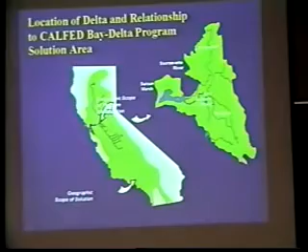You're talking about a situation where you have a lot of rainfall in Northern California, very little rainfall in Southern California, but a big population base there and a big agricultural base here. So the idea is to get water from here to agriculture and then to the urban areas, and the delta is really the choke point, the position where you're trying to get water through.

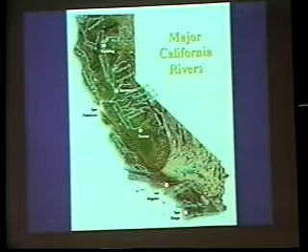Next please. I talked about all the various rivers. As I go through today, I'll be talking about various engineering projects related to the delta, and as I do that, I'll be talking about some of the dams that are on these rivers, and the various influences of some of these rivers, the various flows coming in and making up the flow out of the delta and into San Francisco Bay.

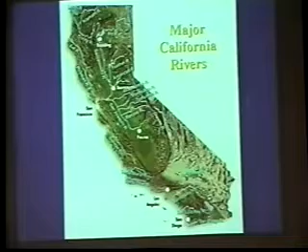This is a highly developed system, of course. You have a lot of dams in the north where the rain falls. Some of those dams belong to the federal government, built as part of a federal project. So you have Shasta Dam up here. You also have, over on the Trinity River, Clair Engle Dam, which contributes to the Sacramento system through a system of engineering piping.

You also have the State Water Project, which is Oroville Dam, which provides water, releases down into the delta. And then you have a way of picking up that water and moving it down into the areas where it's needed in Southern California or in the Central Valley.

There's also some local projects, some notorious and some other. You've got the Los Angeles system taking water down to Los Angeles from the Owens Valley. You've got East Bay MUD, which takes its water through an aqueduct to this area, and you have the city of San Francisco taking water from Hetch Hetchy and moving that through the San Francisco region. Next, please.

So again, from a political point of view, the Delta is very important. It's a source of drinking water. I'm putting that up front because I work for the Contra Costa Water District and we provide urban drinking water, so that's the main thing we look at in terms of dealing with the Delta.

We also have a lot of plant and animal species supported by the Delta. It supports the agricultural industry south of the Delta. There's a lot of housing and infrastructure within the Delta. The Delta is important for fisheries, both those resident within the Delta and fish that come in from the ocean, move up through the Delta and into the upper tributaries. They have to move through the Delta where they're susceptible to pollution, pumping, diversions, etc. And it supports California's $1 trillion economy.

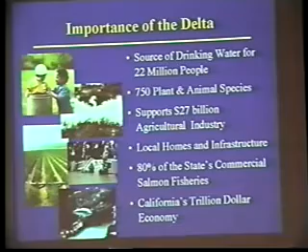Next, please. So again, from an engineering perspective, if you're looking at the Delta, you can break it down into the main flows of the Sacramento River coming in. What I'll be talking about later is some of the plumbing that's been done to the Delta — there's a little channel here that takes water out of the Sacramento River where it would normally go and feeds it into the central Delta. That's why I've just shown the two arrows. We'll come back to that later on.

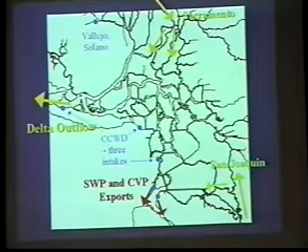And again, you have the San Joaquin River coming in from the south, and I've colored it a different color because it's got a lot of agricultural drainage, pesticides, a lot of extra salt in it, so we need to watch out where that water goes. Most of the time, which is fortunate for some people, not for others, a lot of that water gets brought over to the very large export pumps in the South Delta, and then recirculated back down to the Central Valley.

However, from Contra Costa Water District's point of view, we have these three intakes here. What we're concerned about is the effect of any agricultural drainage and pollution like that coming into this area.

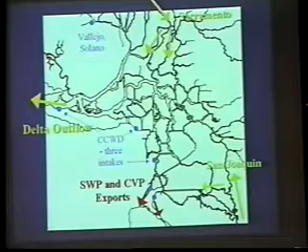So again, a lot of the issues we'll be looking at — as you step in as an engineer and say, we can fix this problem, we can pour concrete and so on — you need to think about all the other effects of pouring concrete or doing those sort of hard engineering solutions on the fish, on water quality, and so on. Next, please.

Again, just a little unashamed advertising for the district that I work for, but it also puts in perspective a little bit of why Contra Costa Water District is so involved in Delta issues — we are right there beside the Delta and we take our water from the Delta. So anything going on in the Delta in terms of degrading water quality affects us immediately. We're the most affected by it.

East Bay MUD, for instance, is not affected by what's going on in the Delta because they take their water through a pipe all the way from the mountains. And if fisheries issues crop up — problems with the fish and we need to shut down pumping — then obviously that's an effect on us as well because it cuts down on our water supply.

So later on I'll be talking about one of the engineering projects we put in, which was this Los Vaqueros project and a new intake. Actually, I put this in the wrong spot — that dot should be over here, on the river. This is our transfer reservoir, not our intake; our intake's over here. We built this new intake so that we wouldn't be dependent on this intake here, which is a little bit saltier in terms of water quality. Okay, next please.

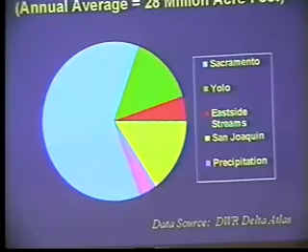If you're looking at the delta and what we're trying to do with it, I've developed these goals based on the Cal-Fed Bay Delta program goals. The Cal-Fed Bay Delta program was started in about 1994, maybe 1995, where all the various interests got together.

The various agencies working on the delta, federal and state, said the way we're doing things is piecewise. We're trying to protect one fish over here, fix up water quality over here, and it's all disorganized. We need a program that looks at this as a whole. So Cal-Fed is made up of Cal for California and Fed for federal, with the agencies all working together, or hopefully working together.

So the goals are really just water quality, ensuring that we have good water quality that can be used for fisheries. We don't want pesticides in the water killing all the fish off. It can be used for drinking water, providing for more than 20 million people from the delta. For agriculture, it can't take too much salt, but it can handle poorer quality water than urban drinking water agencies.

We need to restore a sustainable ecosystem in the delta because of all the resident fish and fish passing through. We need to reduce the mismatch between water supply and demand, and that was very well crafted by Cal-Fed, the way they talk about the mismatch.

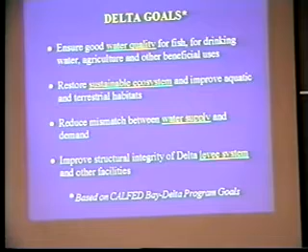And that happened in 1972—an island, Andrus Island, failed. Normally at Rock Slough, at the CCWD's intake, we're trying to keep water quality better than 250 chlorides. When that happened, the chloride shot up to 472 milligrams per liter, and it persisted for several weeks before slowly dying down again.

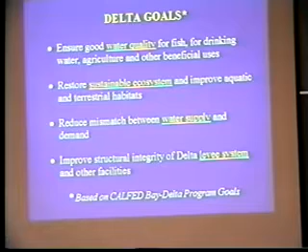So in a big earthquake, this water supply for 20 million people and for agriculture could disappear because the levees could fail. So that needs to be looked at as well.

So some of the things I'll touch upon today, I'll go into more detail with case studies on some of these issues. There are different ways we as engineers can roll up our sleeves and solve this through concrete and building hardware. One way is to build barriers in the delta to move flow in different directions to improve water quality. We can also build barriers to keep fish in the larger river systems rather than letting them stray into a different river system where they might get lost and end up heading in the wrong direction.

You also have barriers for water levels, down in the South Delta. There you have these huge export pumps. When they turn on, they essentially drop the water level because of the need to pull water out of that area. You need a hydraulic gradient to get the water flowing. Another way of looking at it is that there's only a certain amount of water you can fit into the South Delta. If you suddenly start pumping it out, it just drops.

So what they're thinking of doing is putting in some permanent barriers in the South Delta to artificially keep the water levels higher in some parts, so that the farmers in that area can pump that water out and continue irrigating their fields in the South Delta. I'll touch upon that a little bit later, about what's good and what's bad about that engineering.

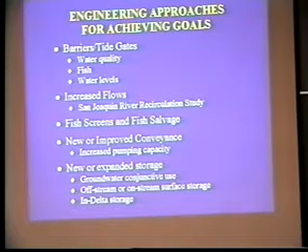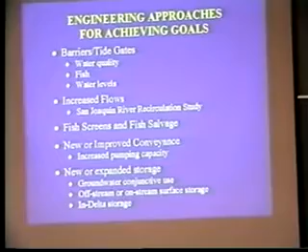The other way to achieve the water quality goals or the fisheries goals is just to increase flow. That's a tough one, because you might say let's release more water from our reservoirs, but you've got a finite resource. If you dump it all at a certain time to protect a certain type of fish, then another period of the year when another fish is endangered, you've got no water — and no water for the farmers or urban areas either.

This one I threw in here, the San Joaquin River recirculation study. There's a problem in the San Joaquin River that it gets too salty at certain times of the year. So one thought that came up is: why don't we just pump water from the delta all the way down through the Delta-Mendota Canal and the California Aqueduct, like we normally do to get water to Los Angeles and the San Joaquin Valley farmers, but once we get it all the way down there, we just let it flow back down the San Joaquin River.

That initially seemed like a dumb idea just from the energy point of view back then. It seems like an even worse idea now because of the energy situation. But again, that's something that we may, as engineers, solve by throwing a lot of energy and might at it, or engineering at it, to actually move water around. We're already doing that — taking water from the upper Sacramento River and moving it with pumps and canals all the way down to Los Angeles — but this is just another version of that.

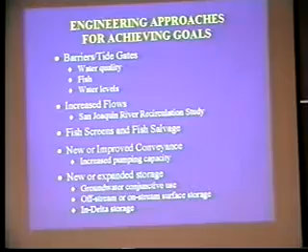Fish screens and fish salvage — that's another way of trying to protect the fish, because when you turn on large pumps in the South Delta, there's a tendency for the fish to head in that direction, or if they're already in that area, they'll get drawn into the pump systems.

There's a lot of work going on within CalFed and other places to design fish screens that actually work. The tough part is that if you have a fish screen at the end of the funnel, the fish are going to move towards it, smack up against it, and have nowhere to go. In a sense that's a poorly designed fish screen, and that's what we have at the moment for the export pumps. So what they do is have little bypasses and try to salvage the fish, put them in a tanker truck, and drive them back into the delta to drop them out again.

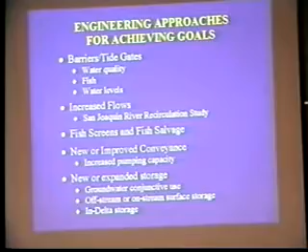That again is not a sustainable or very sensible idea, because you're handling these fish, bringing them into hot, warm water in a tank, dumping them along the road, and then putting them out in the delta where a lot of very bright scavenger fish are waiting, because they know it's feeding time — and then they get eaten.

So obviously when you're designing a fish screen, you need to design it somewhere where the flow is going by tidally, and you're taking the water out sideways so the fish can keep moving past. That's the goal of some of these designs, and I'll try to touch upon that as well.

New or improved conveyance.

One way of solving your water problems is just to build bigger pumps, but that just exacerbates all the other problems. Maybe bigger pumps seem to draw fish towards themselves through narrow channels, so maybe you can make the channels wider instead.

Another solution engineers come up with is that we need new or expanded storage. In other words, capture high flows when it's raining in wet periods, store it in a reservoir, and release it later. So that's another goal, to develop storage alongside other actions being taken to fix the delta situation.

One way is to store that water in the ground. One problem is you can't capture water quickly enough to put it into groundwater—it takes time for it to seep in or for you to pump it in. So it's good to have a reservoir system to put the water in and then feed it into the groundwater system. There's a big debate about whether you want off-stream storage or on-stream storage.

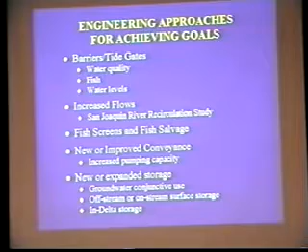Okay, thanks. So, just to give a balanced presentation, I wanted to point out that the last part was talking about let's build some more dams.

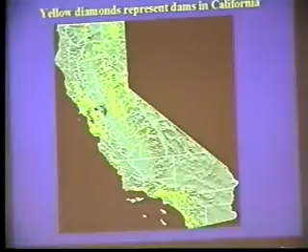As you can see from this graphic, which came from DWR's Delta Atlas, there are already a lot of dams in California, and environmental agencies have been quick to point that out. In fact, at various times there's been action to actually take out dams, ones that are blocking migration passages for fish. So we have a lot of dams already, and we really need to look at softer solutions to this problem.

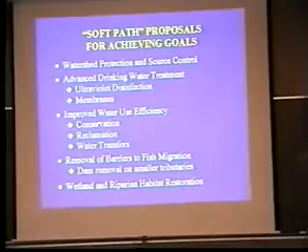So this is what some of us call soft path proposals, and other people would call sensible proposals, but they are all valid solutions to this problem, and they all need to be built together with the hard engineering and the soft engineering approaches.

So one approach is, if you're worried about water quality, don't just try to solve it with barriers moving the dirty water one direction and the good water the other direction. Maybe you go upstream and try to find the sources of agricultural drainage and other contamination going into the delta, and protect your watersheds—look at the erosion caused when you cut down forests and things like that. So there's a very strong watershed protection program within CalFed as well.

The other issue is if you're worried about the water in the delta not being good enough to drink. The usual reason is, one, it's a little salty to the taste, so you might need to worry about that. But unfortunately there are other issues too—if you have pathogens and germs in the water, you first have to disinfect it before serving it to customers.

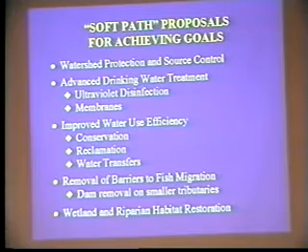As you get further into what kind of pathogens are in the water, you need to dose it with more disinfection over time as standards become more stringent. What we're finding is that the more you disinfect, the more you produce byproducts that are cancer-causing or suspected to be. So EPA steps in and says, first get rid of the germs, but don't produce too high a concentration of these disinfection byproducts—it's a balancing act between removing pathogens and not producing too many suspected carcinogens.

So another approach is using disinfection that doesn't produce problem disinfection byproducts, such as ultraviolet disinfection. That's being used in the wastewater industry, but not so much yet in the drinking water industry, though it is coming in a big way.

So that may be part of the solution, is just to find a different way of disinfecting so you don't have to produce as many byproducts. The point is that the byproducts you produce are directly proportional to the salinity of the water you're disinfecting, and also how much organic carbon is in the water. So depending on what's in the water coming into your treatment plant and how much disinfection you apply, that gives you the concentration of disinfection byproduct.

Unfortunately, the delta is a bad place for that, because there's a lot of peat soil, so there's a lot of organic material in the delta. So you're starting off in a bad situation. You're stuck with a lot of organic carbon in your water. And because it's connected to the ocean, you've got the salinity there as well. So that's why we need to be looking at how the flows are going in the delta, to try and keep the salt out and also minimize the organic carbon in our water.

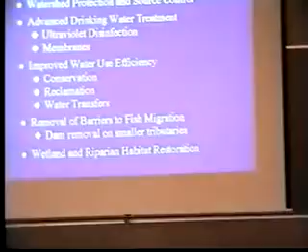Another way of dealing with this is with membranes. If you push the water through high pressure or low pressure membranes, you can take out, if it's a high pressure membrane, you can actually take out salt. If it's a lower pressure membrane with larger holes essentially, you can take out some of the pathogens and germs, and that reduces how much disinfection you need to do.

So this is something that's being raised, that why build large reservoirs to solve the drinking water problem when you can do some of these techniques as well. I think there's going to end up having to be a balance between the two. You do some of this and also develop some storage.

Similarly, improved water use efficiency, conservation, reclamation, so reusing the water. And I put water transfers in here too. At the same time, we need to be using our water more efficiently, moving it from people that are wasting it to people that can use it more efficiently, or get higher yield in terms of productivity. But that's a very political decision to make. You want to let the marketplace maybe decide that. If water's not being used profitably, then if you set up the right market situation, that water will be transferred.

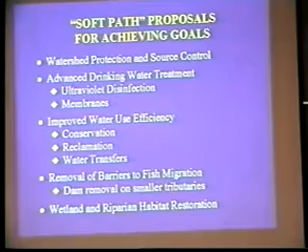The only problem is that the Contra Costa Water District sometimes leaps up and is a skunk at the party, saying, this is great, you're helping fish, you're helping everybody, but we're going to be careful because these areas are very rich in nutrients and organic carbon, and whatever they produce in terms of additional organic carbon gets back into our drinking water problem. So there needs to be a balance on that as well.

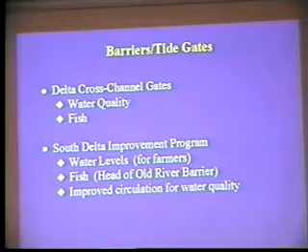Just in terms of barriers and tide gates, let's go into a couple of engineering examples. One is the Delta Cross Channel, which I talked about earlier with respect to the splitting of the Sacramento River. A channel was built by the U.S. Bureau of Reclamation to take water out of the Sacramento River and feed it more efficiently into the delta, to freshen it up. The only problem is that while it improves water quality, it can also move fish out of the Sacramento River on their way out. So they're moving down from Shasta Dam back out to the ocean, but they can get lost within the delta if they move with the water into it.

Then the other one is the South Delta Improvement Program that I talked about before, where we want to develop higher water levels when the export pumping is going on, so the farmers can divert water onto their fields. We also want to block fish that are moving up the San Joaquin River or down the San Joaquin River into the delta.

We want to stop them from being sucked across to the pumps. So we might want to put a barrier there to block the fish from going straight to the pumps. And also we want to improve the circulation in that area so the water isn't too salty for the farmers.

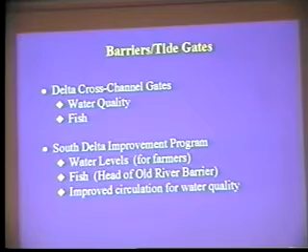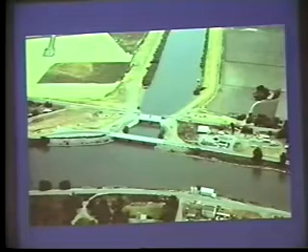Okay, so I've talked about this pretty much. It's designed to increase the flow of fresh water into the delta. It's closed at times for the delta flooding issue. We do get this out-migrating salmon and other fish straying through there. It's closed according to the State Water Resources Control Board regulations for a certain number of days per year, in certain months. And then the key thing I want to talk about today is that in October and November of 1999, the fisheries agencies were watching, and they noticed that there were a couple of fish showing up further up on the Sacramento River.

So they requested that the cross-channel gate get closed so that when the rest of the fish start moving, they will be able to move past the cross-channel without going into the delta.

But unfortunately what happened is it was at a time of very high delta pumping, very low delta outflow. So when they slammed the gate shut, suddenly the water quality in the interior delta, the salt concentrations, also shot way up. I'll show you a graph of that in a minute, but this became a kind of cause célèbre.

Because it was at a time when there was a lot of arguments going back and forth between the fisheries agencies and water purveyors. And so what the water agencies saw this and sort of said, here they go again, see all the damage that they're doing to us. And they rushed back to Washington and sort of said, we've shut down Silicon Valley because you closed this gate.

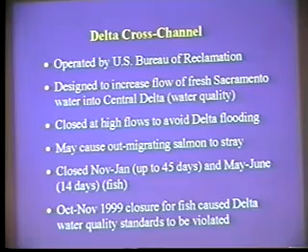Essentially. Okay, so next slide. And this is just an example of some real data showing what actually happened at that time. Here are the chloride concentrations that were occurring before they shut the gate. Then they shut the cross-channel gate at this point, and you can see from the blue triangles that the water quality shot way up.

And you've probably forgotten that, remember at Rock Slough where we take our water, the standard is supposed to stay below 250. So the projects who are operating the delta have to arrange to have the right amount of flow going through the delta at all times, so that it never exceeds the chloride standard of 250.

But because of this action, it suddenly shot up and overtook the 250 standard, and the standard was violated for a short period of time.

And this we put in here from Professor Sobey, these two results here are actually from a computer model of what went on. And again, if you ignore this just for a second, I'll come back to that, I promise.

What we did is we started from way back at this point in time. We put into the computer model the flows that we estimated to be occurring in the delta at that time. And so the caveat is, do we really know that those flows were there? Do we know how much water is being evaporated, how much is being taken onto local farms in that area, how much was really coming out as delta outflow?

So that was calculated, and as we went through, then we did one run with the red line for closing the cross channel and one with leaving it open, just to show that this was in fact a bona fide effect of closing the cross channel.

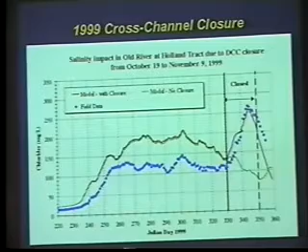The trouble with the delta is you never know what would have happened if you hadn't done what you did, because as one colleague says, there's only one delta, so you don't have a control case to compare against. You have to do this with modeling. We got this similar rise that we did see, but if it hadn't closed, we would have gotten something like that instead.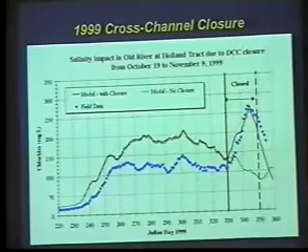The next question is whether there's a better way of doing this—maybe closing the cross channel only for certain parts of the tide to protect fish when they're moving through on a certain phase. For instance, when the flow is ebbing out of the delta downstream, that's when fish move, so you close the cross channel then. But when the tide changes and water comes back up, maybe you can open the cross channel, squeeze water without fish into the central delta, and keep the freshening effect going.

That test was done recently, in the beginning of last year, and we're still analyzing the results. The question is what the effect is of just closing the gates on the ebb tide. They found that doing it that way really doesn't impact water quality much. So you've got to back that up by asking what the impact is on fish—is it still hurting fish because the gate is open some of the time?

Some of the detailed monitoring they've been doing on fish looks at whether they move during the day or nighttime. They suspect fish may move mostly at night, in which case you would only need the gates open for the part of the tide that was flooding during the daytime, so that you'd be protecting the fish more.

When you do that, you do see some impact on water quality, but much less than if you had just closed the gates completely. So this is still going on—if the gates are open 6 hours a day, what does that do for water quality, and is that being overprotective for the fish? These are interesting experiments that are ongoing.

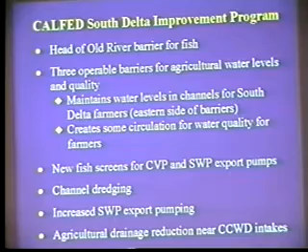Okay, the South Delta Barrier Program—we'll skip to the next one. I talked about this in my previous session, so I'll talk about it now in terms of the map.

What the DWR is planning on doing, and has been planning for about 10 years now, through about 3 draft environmental impact reports, is to come up with permanent barriers at these three places in the South Delta, to keep the water levels in this part of the South Delta higher and compensate for a barrier everyone agrees should go in for certain parts of the year, to stop fish coming down from the San Joaquin River from getting sucked across to the pumps in this region.

So what we'd like to do is shut this at certain times of the year, move the fish on out through the delta. But once you do that, the water flow into this area is reduced, drawdown increases, and the salinity in this area goes to heck.

So what they want to do is put gates in here that allow water to flow from west to east, but not the other direction—in other words, keep the water level up. They're also doing other things like dredging channels in this region, which makes us nervous because our intake is right there.

At the same time, as part of all this, they want to increase the pumping out of here. So not only do they want to correct an existing problem, they want to move forward and increase their pumping while still improving things.

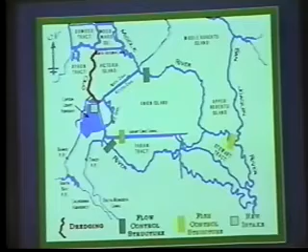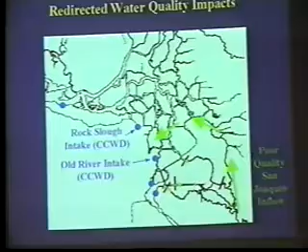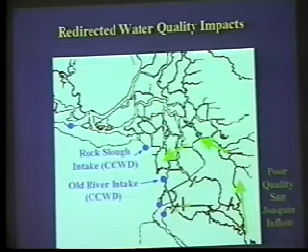One of the things we are concerned about, and it's not immediately obvious when people talk about this, is that if you block off all the flows in this region, maybe you improve circulation and water quality here, but then where does that bad water go? Unfortunately it circulates around and hits us first. These guys downstream would get a slight degradation too by the time it circulates all the way through, but unfortunately it hits us first.

So what we propose is, if you're going to build these barriers and increase pumping at these locations from an engineering point of view, you need to do something in this region to offset the impact on water quality at our intakes. There's another project going on to reduce the effects of agricultural drainage or local drainage from these farms and islands near our intakes, so we can offset any impact of this circulation or redirection on water quality.

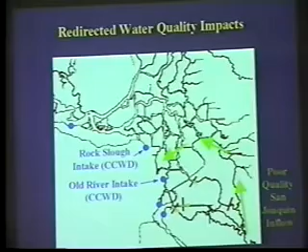Part of my list before was just saying we had different things we can do. We can put in barriers, increase flows, or convey water differently through the delta. If the delta is the bottleneck, let's open it up so we're not choking the flow coming through. The various proposals that have been suggested — and this is before my time, so I don't take any blame for that — include the peripheral canal, which I'll talk about in terms of the map in a minute.

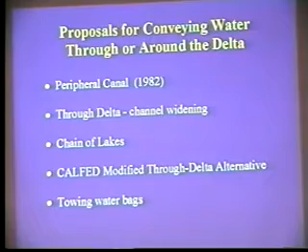That was defeated soundly by the voters in 1982, so everyone went back to the drawing board to see what they could do. More recently, as part of CalFed developing its alternatives for solving the delta, ideas came up about taking the levees, which are already crumbling anyway, and setting them back. Then you've got wider channels, less flow, and the fish will have places to hide along the banks — you can create some riparian habitat. They won't get drawn as easily down into the south delta toward the pumps.

Then there was another one called chain of lakes, which in a sense was really a combination of conveyance and storage. In other words, you take a whole series of islands in the delta and use them as reservoirs. If you're a good engineer, you can build a siphon between those lakes and move the water as a cascade all the way through the delta. I think there were big issues there — these things are sitting on peat soil, and they're just going to float up. So how do you hold them down so the siphons between the chain of lakes don't float away? This thing was hugely expensive and got dropped almost immediately.

And then I'll talk a little bit about where CalFed is right now. The other one I put in here — it may look like a joke, but it keeps coming back every now and then — is putting water in bags up in Alaska and bringing it down the coast to help our needs. The person suggesting this recently threw it in as a way of moving water from the upper Sacramento.

He would fill the bags up further north by Redding, somewhere like that, tow them down the Sacramento River, and discharge or empty them somewhere near one of our intakes in the Suisun Bay area. But if you did the math on that, you'd have these huge bags, 200 feet long, trying to maneuver their way down narrow rivers. The calculation is they'd have to be moving in, offloading, and moving out every 16 minutes or so. So it's something that really wouldn't work.

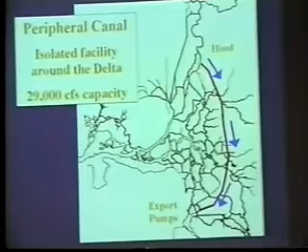So the peripheral canal was a bad idea, for one reason it's a 29,000 CFS capacity facility. A lot of the operations going on with the delta at the moment, you're lucky if you have about 15,000 CFS flowing down this part of the river. So it doesn't compute to have a large intake like that trying to take water out when there's less coming in. So that wasn't going to work anyway.

I think they wanted to build it large enough so that during flood flows they'd have the opportunity to take water. But that makes people nervous - how's a facility like that going to operate? They would put water in a canal, move it around, and pump it away. That got defeated soundly because it took people away from the idea of the common delta pool - that everybody should have a stake in what happens to the delta: are the fish thriving, are the levees stable, is the water quality good. If you're getting your water out of the end of this canal, you don't really care what's going on in the delta because you're independent of it.

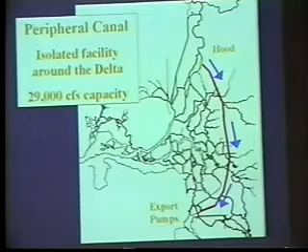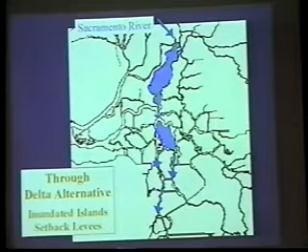This was the through delta alternative some urban agencies were considering. If fish get drawn along these narrow channels by the mean flow down to the pumps, why not take an island, inundate it - just as an illustrative example, not announcing a specific island - and create some habitat for fish. Some islands are too deep to be shallow enough for fish, but you could work on that. You'd create a channel still connected to the delta and still tidally varying, but with slower moving water down into that region. That was suggested, but it wasn't taken up by CalFed.

What CalFed ended up doing instead: channel enlargement, possible modifications to widen the channel a little, but not inundate any islands. They still kept the south delta barriers I mentioned earlier. And something that crept back in - not in the immediate preferred alternative, but slated to be studied - is the idea of pumping water out of the Sacramento River. It wouldn't go all the way around, but would inject water a little faster into the interior delta instead of letting it move through the delta cross channel, located here.

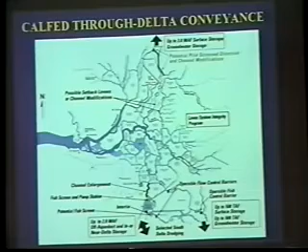Here's another idea that got thrown out - engineers brainstorming, trying to be biologists as well. This came from the problem with fish screens in this region, because it's at the end of several large channels drawing fish down into that area with nowhere to go, so you really can't screen them safely.

Our intake here is on the side of a channel with tidal flows of about 10,000 CFS moving back and forth, and a net flow through here also about 10,000 CFS. So you have tidal exchange plus net flows sweeping by, while we're taking out only about 250 CFS. We're taking very little, but from the side of a large flow. At certain times of year, other facilities end up taking tens of thousands of delta smelt - a resident fish in the delta. When they're taking thousands per day, we in 3 years of sampling in this region have taken one. This is a smaller intake, but it's on the side of a river - it has the flows, and fish aren't going against the screen, they're going past it. There's really no horizontal flow, very small velocity towards the screens.

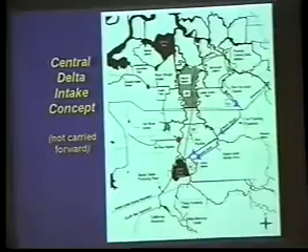What you're trying to do is look at what the fish need, what the water quality needs are, since this is still a good water quality area, and also try to meet water supply needs by designing pumps that can operate more often at larger capacity so they're not shut down as often. These huge pumps may be a concern for fisheries, but under the biological opinions and operating criteria, some of these pumps get shut down almost entirely for long periods during the springtime. That's something water users are very concerned about, because it represents a loss of water supply.

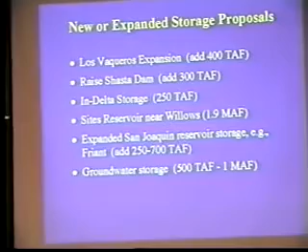Okay, so we're moving on to looking at new or expanded storage. I'll talk about Los Vaqueros Reservoir, which CCWD has just completed for water quality purposes, and the thought is that maybe it could be expanded. If it's working well for CCWD, maybe we can build it bigger and make it work for East Bay MUD, Santa Clara Valley Water District, Alameda County Water District, and various other water districts in the Bay Area.

Another idea is to just add 6 feet to Shasta Dam, which could produce up to 300,000 acre-feet of extra water. Shasta Dam is currently about 4.2 million acre-feet, so you're not adding a lot, but this is still a large supply for helping meet deficiencies in agriculture and urban supplies. The usual number you see in the newspapers is that 1 acre-foot is enough to provide water for 1 or 2 families for a year.

In delta storage, I mentioned you can take some delta islands and flood them, and there's a proposal that just got permitted by the State Water Resources Control Board to do that. It's going to be a very expensive project, so it may not go ahead, but it's being considered. There's also an idea of building a big off-stream reservoir up north on I-5, north of Sacramento, which would bring in a lot more water that could be used for water supply and fisheries needs.

You could also expand some of the reservoirs further down in the San Joaquin Valley, or go to groundwater storage. These are all proposals as part of the CalFed program, so they're not ideas I'm just making up.

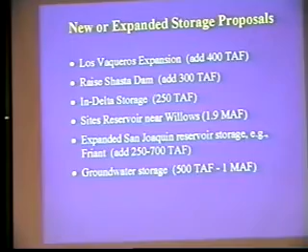This is our Los Vaqueros Reservoir as completed and pretty much full. It's only 100,000 acre-feet at the moment, and remember the idea is expanding it from 100,000 to 500,000 acre-feet capacity. To do that you'd need to take out the existing dam and put in a new, larger dam, since geotechnical engineers can't just start piling concrete or dirt on top of the existing dam—it wasn't designed to take that.

So if this does go ahead, they'll have to take the dam back out and put a new one in. And so what the uses are, maybe the next slide shows.

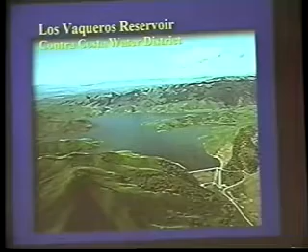This is where the reservoir is, filled from this point in Old River, and water is released from there down into our service area and provided to our customers. It's designed to store water—we store good quality water in there, and later, at times when delta water quality isn't as good, we can release water from the reservoir and blend it with delta water to meet our new water quality goals, trying to meet a 65 milligram per liter chloride delivery goal.

As I said before, the delta can go up to about 250 chlorides according to state board regulations. So we have to have enough good quality water in the reservoir that whenever it does that, we can release water to blend it down to 65. That 65 standard was designed before some of the newer drinking water quality regulations came in, so if we start again, we may be asking for better water quality than just 65.

It also provides ecosystem benefits, because at certain times of year we can use the reservoir to meet all our demands, which means we can get off the delta completely in terms of pumping. So if there's an issue with fish moving through the delta or being close to our intake, we can actually shut down for periods of time.

And that occurs naturally anyway, because usually when we'd be releasing water from the reservoir to blend for good delivered water quality, that's usually the time when you've got low flows, therefore high salinity in the delta, and the fish are more susceptible then too. So automatically, because we have this reservoir and operate for water quality, we tend to get off the delta when it's most important for the fish.

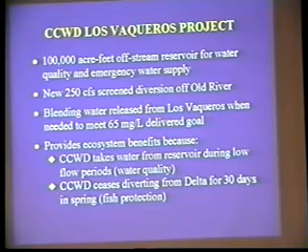We joked before that these projects are usually about a 10-year process. We started working on it in 1987, and it took about 7 years to get the necessary permits and get people to agree it could move forward. The reservoir was completed in 1998, and it was the first reservoir completed in California in 10 years. Up until then, EPA had been very skeptical of new reservoirs.

They were saying you need to prove not only that you're not going to harm anybody, but that you can actually provide some benefits, and also show you're not wasting water and just building this to meet wasteful needs. So we had to go through a lot of hoops to get this far. The only other major reservoir completed since then is Metropolitan's Reservoir in Southern California, which the last speaker, Ron Costello, talked a little about.

That was interesting - in January 1999 we managed to get the reservoir full in a year. Beforehand, we did all our planning, modeling studies, looked at the hydrology and water quality, and determined that on average it would most likely take about 3 or 4 years to fill. But luckily, we got the reservoir completed during a remarkably wet period, so we were able to fill it very quickly.

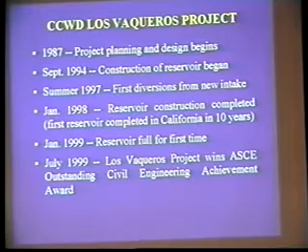So that's where we were. Now, of course, someone stepped up and said, how about we make it bigger? This will be fun for us as engineers, to first see if this is even feasible. So what I'm presenting is that we're moving forward on studying this idea. Nobody said this is going ahead or that it's acceptable, but there's no harm in studying it to see what could be done.

Because we want to maintain local control, or at least control over our own reservoir, we've contracted with the California Department of Water Resources to start performing these studies. This will be about a 7-year process before people start pouring concrete, compacting dirt, or even pulling down the old dam. So this is going to be a long time.

We're looking at what happens if you expand Los Vaqueros - you'd have more water for local uses in the Bay Area. There's another part of CalFed looking at not only new storage in the Bay Area for water quality, but maybe East Bay MUD could use their pipeline to deliver water to Alameda County to improve water quality there. Because San Francisco and East Bay MUD get their water from the Sierras, but Alameda, Contra Costa, and Santa Clara all get their water from the southern delta.

So they're all susceptible to these water quality issues.

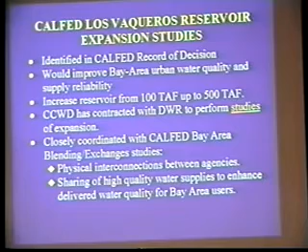Okay, maybe I'll just go through this fairly quickly.

The state board is a way of operating the delta. If you're an engineer trying to operate the delta with pumps, making releases from an upstream reservoir, keeping an eye on water quality, making sure the fish are moving, closing the cross channel, playing around with your barriers in the south delta, adjusting your pumping, you really need to be operating to a set of rules.

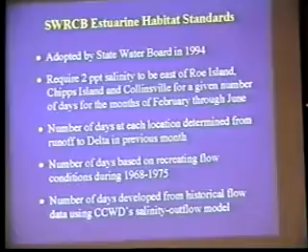Those rules got changed in 1994 and made more stringent. What they said is you have to meet a higher water quality. That ended up costing more water because you had to release more water into the delta, or leave more water flowing through the delta, to meet those standards.

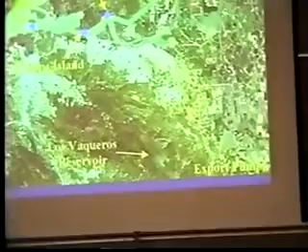Maybe if you just go to the next one, I'll talk about it as we go. Basically what they said is that we're going to draw some lines in the sand at these 3 points here, and say that historically, if we look at where the salinity had moved into the delta at certain times, we found that the 2 parts per thousand salinity—remember I said the ocean was about 35 parts per thousand—so as the Sacramento mixes with the ocean water coming in from this side, you get this gradation of salinity all the way up.

Historically the 2 parts per thousand has been in this area here for a certain number of days per year in certain months. So what they did is look at that historically and say, let's set standards that preserve it. So, say to the project that you operate your pumps in such a way that in February you meet 2 parts per thousand in some of these locations for 50% of February, or 25% of February, depending on other conditions. So those are the rules that are out there.

So what we had to do is come up with rules that were protective for fish and were somehow efficient in terms of trying to not waste water, trying to meet these standards. The key there was to understand what had happened historically and again design those standards to work.

So we really needed to understand how much flow does it need coming down this river and coming through the San Joaquin part, which is this part here, coming out in this area here—how much delta outflow do you need to meet this particular requirement?

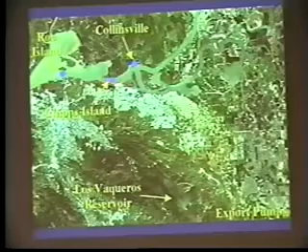So what we were doing at CCWD was developing a model of what is the relationship between outflow and salinity. Not only the outflow today, because the outflow today is not what's determining the salinity today—it's an accumulation of what the previous outflows have been. You could have a very high flood that would move all the salt out into San Pablo Bay, for instance, and further out into the bay.

And then you could drop the salinity, drop the flow very quickly by turning on the pumps, for instance. But that salt won't rush back in immediately. It takes a while with the tidal exchange and so on to work back in. So there's not an immediate response to your change in outflow.

So what we were able to do then is go through and do the modeling, saying, let's run the historic flows through and see how many days were met under certain conditions within the period that they were interested in, and craft standards that could be then used to operate the delta in the future.

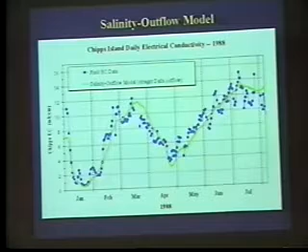And the reason for that, and it is an important part of the delta—just to get into another engineering aspect, and I should be finished in a couple of minutes—is when you talk about the outflow from the delta, usually what you do is you calculate what the flow is at Sacramento, for instance, and what the outflow is coming into the delta from the San Joaquin River, and then usually you just forget about what's happening in the delta.

You just say that the water goes through the delta, some of it maybe is exported out, some of it's evaporated or used on the islands, but what they usually forget is the storage in the delta itself. If you look at the tides and filter that, the storage in the delta is going up and down maybe on a 14-day cycle, and it's not very regular, but it is going up and down.

What you find is if you look at the water level in the delta being this full, and you drop it by about 1.5 to 2 feet, that's a lot of surface area you're dropping. So that's a lot of water that gets squeezed out of the delta into the bay, in addition to any flow coming from Sacramento. It ends up being a huge amount.

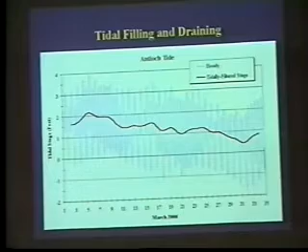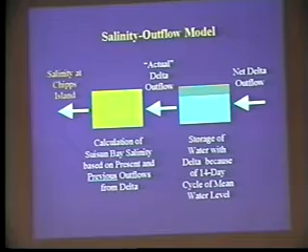So maybe if you go to the next slide, this explains it. You have a model that you put in the calculated outflow that ignores storage in the delta, and then you correct for this raising and lowering of the mean sea level in the delta over a 14-day cycle, and then you put it in your model and see what happens. When you do that, you get this sort of fluctuation going on here.

We're a little high here and various things, but look in this region here. What was amazing is when we first did this, we had used another more sophisticated computer model to work out what coefficient we should use to convert change in tidal height times some factor to give you the outflow. That factor should be related to the surface area of all the channels in the delta, but we didn't go and measure those. We just looked at what another computer model would give us, put it into a spreadsheet, and ended up picking out something pretty close to the change you are getting.

Okay, and that's the end of my talk.